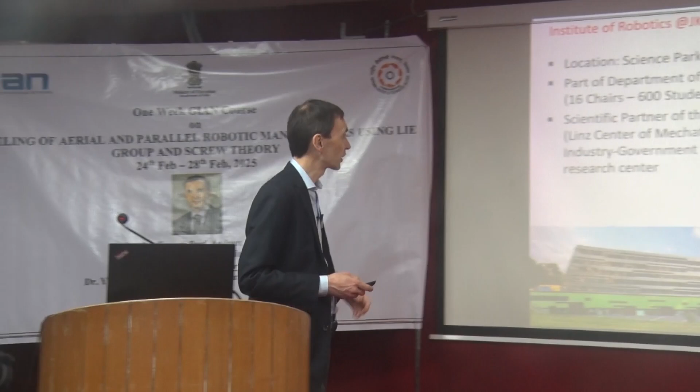You don't like them. Yeah. No, because they are quite complicated, right? And this kind of theory is supposedly much easier to do, and I believe it is. You just have to know it. So before actually going to see what that is all about, a bit of introduction about where I come from and what we are doing, at least roughly.

So where we are, maybe here. Okay, so zoom out. That's Europe apparently. This is Russia. You are somewhere here, just not visible. And we are here. This is Germany. This is Austria. This is Spain, and so on. So which part are we in? We are actually in this part, just between Germany and the Czech Republic.

And the university is called the Johannes Kepler University Linz. It doesn't say here. So JKU stands for Johannes Kepler University. You know Kepler? Yes, it's the guy with the stars and the planets and so on. Okay. So anyway, the structure maybe is interesting for you.

It's a bit different than you're used to, maybe. Every country has different structures. So we have the university as such, right? Then we have faculties. There's the faculty for medicine. Then we have social sciences and law. And then we have the natural sciences. And within the faculty, we have different departments, okay? And we are part of the department of mechatronics.

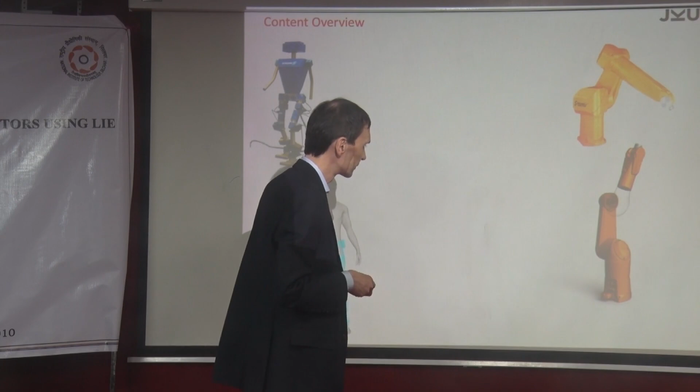Okay. No, this is one way. This way. Yeah. So systems. I guess you know many of these systems. Industrial robotic systems, I guess this is what you know, right? So this is a robotic arm. They call it a serial kinematic chain. In this case it's a 6 degrees of freedom system. Here we have also a 6 degrees of freedom system, but we also have a 7 degrees of freedom system.

And then we have, of course, humanoids. Right? This is our own humanoid. Of course, it doesn't look like the one from Boston Dynamics or any of these fancy systems. But anyway, it's our own and it's working. This is not really what we are aiming at. It's just for students, but a very interesting topic.

Then we work a bit on this. Yeah, what could it be? It's like an exoskeleton, like a lower limb support device, right? Because for many reasons, either you have a sickness or you get injured, you need assistance. And also our population is getting older, right? More people are needed to support elderly people, and of course we have a shortage of this. And this is why we are interested in low-cost support devices, assistive devices for humans.

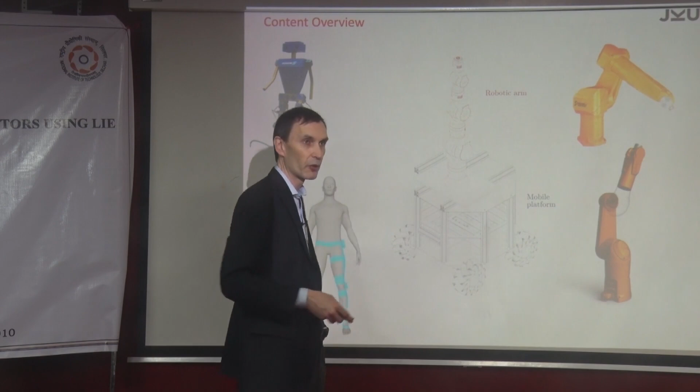Okay. And then, of course, there is this mobile manipulation topic, right? In the modern manufacturing industry or in other contexts, you have a robot, again a serial structure, like a robotic manipulator, and you mount this on a mobile platform. So what you have here is a mobile platform that can go all around, with omniwheels, for example. This is what's used in indoor logistics, right? These systems go through the factory autonomously. But now the idea is to have a robotic arm on top of it to do some manipulation tasks.

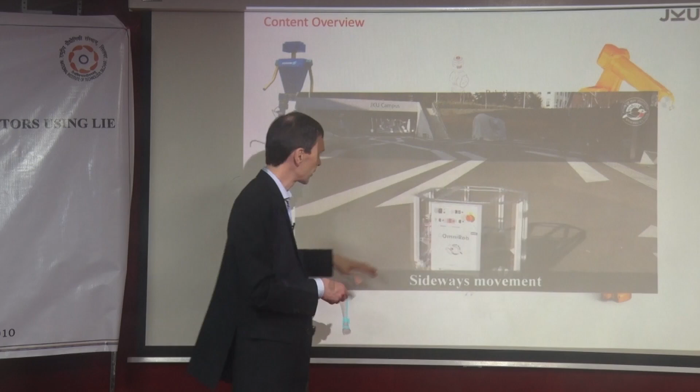And actually we have also this kind of thing. If you want to really optimize it and control it in a good way, then you have to understand the system first. And that's what we're doing here. This is our prototype from many years ago, an old video. This is how it works, and then you put this arm on top of it, and then you have a mobile robotic system. Of course, it's easy said, but not easy done, right? It was a bit of work to get the arm on top of it and so on. But anyway, it works.

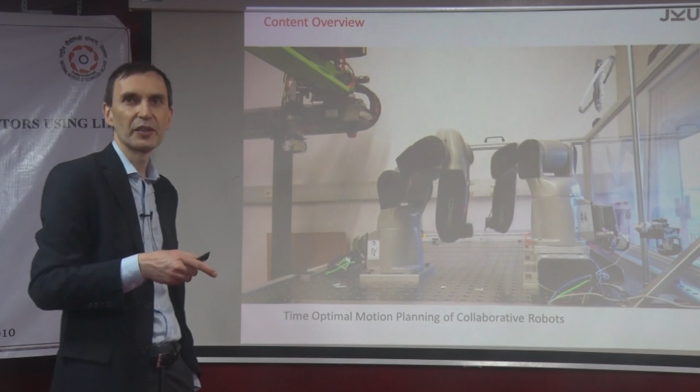Now, if you look at these robots, we have 2 robots here. Of course, they're industrial robots from Comau, an Italian company. And what you see here is what you cannot do with an industrial controller. They are operating with a speed that is not possible when you just use the standard controller. Yeah, I'm just looking here because I see the screen there. So what you see here is an operation that you cannot do with just the standard controller, right?

For many reasons, and one reason is that you wouldn't be able to move them as fast as possible without going into the system. This is why you need a model-based controller. So we have a model-based feed forward that is helping you. I'm not sure if you come to this point in the lecture. And the second important point is that they are actually avoiding collisions.

And that is something that is not easy. So we have 2 robots, they are semi-independently operating, and we are avoiding collisions in real time. So this is also something that is not easy.

Okay, another application where without models you wouldn't be able to do it is lifting of objects. This sounds pretty simple, right? So what happens here is that you have 2 robots, and they are lifting an object. Oops, this is so fast. Exactly, this is the object they are lifting. And by the way, that object would be too heavy for each of them, right? But together they can do this. And this is called collaborative robotic manipulation.

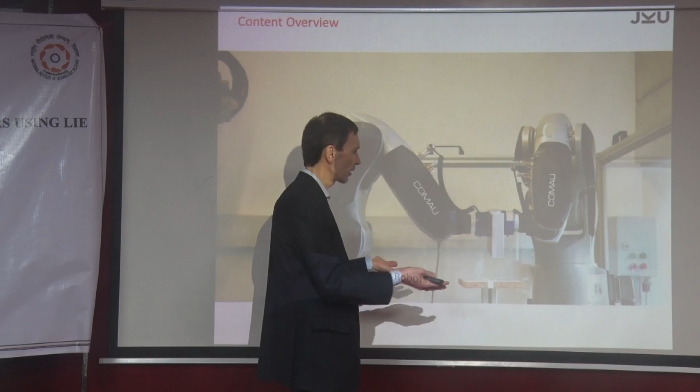And if you think a bit about what you have to do in order to get it up and running, that's not easy. Because first of all, again, this is with the maximum speed that you can do. But anyway, you cannot do this with standard industrial control. What you have to have is a model, and you have to have a good control scheme behind it. It doesn't repeat automatically, so I have to repeat it.

So what's the problem here? What are limitations of an industrial robot? What's, for example, the accuracy? So how precise can you position the end effector? So the end effector is this, the end, the flange here. If you control a robot, what is the precision with which you can reach a point? What do you think? Is it a millimeter? Is it a tenth of a millimeter? What is it?

Millimeter? Yeah, if you just buy it off the shelf, it could be in the millimeter range. And that of course is not healthy, because if it would be a millimeter, plus minus here and plus minus there, this would slip, right? So this is why you see these blue elements here. These are force torque measurement devices.

Okay. So what you do here is a kind of real-time, they call it admittance control. Essentially, you control a force, but essentially you control a kind of elastic behavior. And that's what you have to do. And that is possible. This is not new per se, but what is new is to do it with this speed, because this is real time. So this is also something just to motivate you, because without the model this would not be possible.

Okay, so let's go to the boring part of the lecture. It's all about mechanics. It's all about mechanisms. And what we are interested in is analyzing systems, in particular systems possibly with closed kinematic loops. Okay, so just to get you all on track, we talk about these kinds of systems here, right? They are moving. So when we say closed loop, this is a 4-bar mechanism, this typical 4-bar crank mechanism.

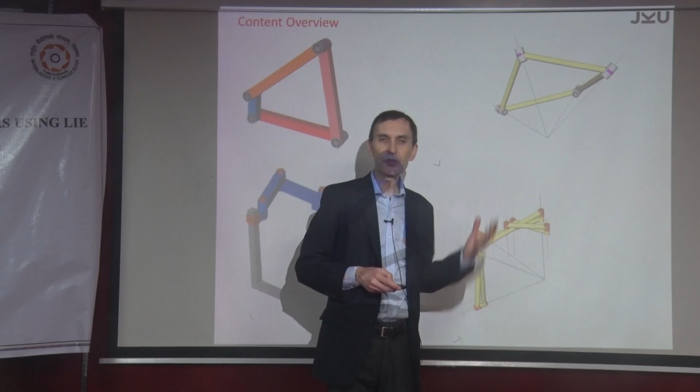This is a revolute joint, and here we have 4 revolute joints, and there is an intersection. For this special mechanism, the axes of the 4 revolute joints are intersecting permanently. This is why it's called a spherical mechanism. As a consequence, the 4 bars, the yellow thing, are moving on a sphere, and the center of the sphere is here.

Okay, but that is also a condition, because otherwise, if this would not be the case that they're intersecting, then it would not be mobile. It would be rigid. It would be a structure, right? If you are in civil engineering, this is good for you, because then this would be purely a static system. Pretty boring to us, because you want to have it moving.

Okay, so what's the connection between the two? Is there any? They have 4 joints, right? They have 4 revolute joints. Okay, is there any other similarity? Maybe? 4 linkages. Huh? Both have 4 linkages. Yep, right. What about the geometry?

One linkage fixed. Yeah, one link. No, it doesn't have to be. They can be free floating. This mechanism doesn't care if it's fixed or not. We'll come to this in a minute. Actually, what you're describing is what we call the topology. Because what you're saying is we have so many links, we have so many joints. That's fine, but I can close my eyes and just throw the links to the joints and I get something. But they are not just something, they are very special.

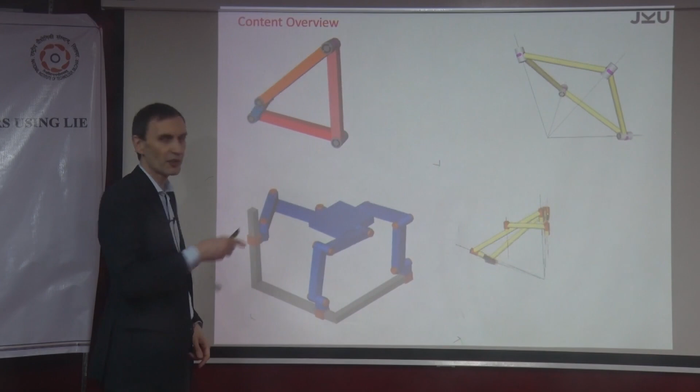So what's the particularity? Why is this moving here? Because the axes of the joints are all parallel, right? Otherwise it would not. And as a consequence, all the bodies, maybe this is fixed, maybe not, are moving in the plane, okay? And I was saying these four links are moving on a sphere. The similarity is that for both mechanisms, all joint axes are intersecting one point.

Here they intersect at this point, and just imagine you take this to infinity. So what happens if you go to infinity? Well, you are here, right? So this is just a projective equivalence. So they're essentially the same, just someone assembled them in a different way, but they're all satisfied by the same conditions.

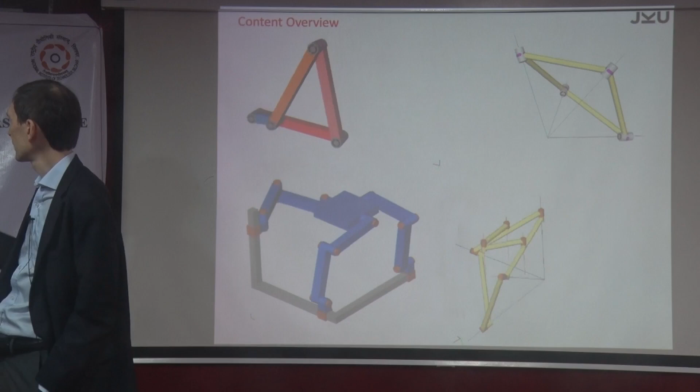Okay, then you can combine them to some funny mechanisms, and let's look at this one here. This is maybe an example of what we call a robot, and in particular one that is called a parallel kinematic robot, and we call this PKM. So PKM always stands for parallel kinematic machine or mechanism. So what's particular about this one? If you are in this area, this is the Singh mechanism that goes back to different authors at the same time, by the way.

And you can say this is the platform. So there is a platform that is to be positioned, right? And if you analyze it, you will see the platform can only translate in space. It cannot rotate. That's important. Number one. So let's say this is the output. You can put something on this. You can sit on it, or I don't know what you can do.

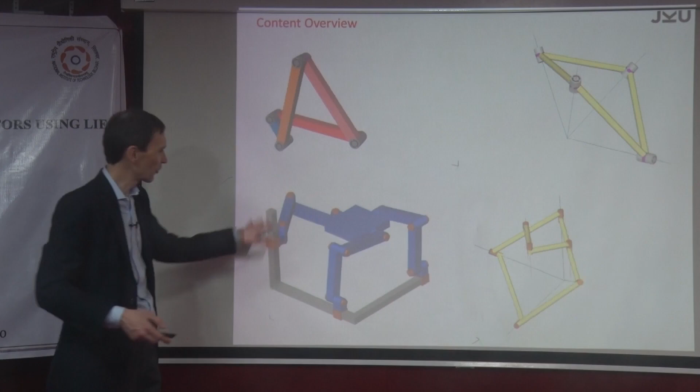And the inputs are the linear actuators, like the sliders here. So these are the inputs. If you have motors there, then you need 3 motors. And this is an interesting mechanism, because you have Cartesian inputs like linear or translational actuators, no revolute joints, right? It's all translations. And what comes out is again translations. You have 3 independent translations, and you have 3 independent input translations. And in between you have some mechanism that does whatever it does. Okay, good. Wonderful. More mechanisms.

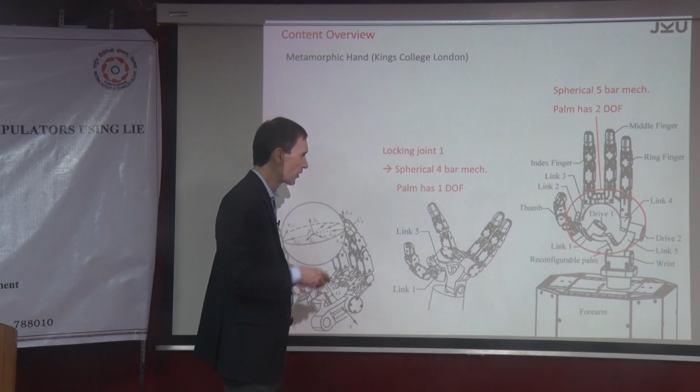This humanoid that I showed at the beginning: many times people want humanoids resembling humans in the sense that they also have hands, like robotic hands. Whether you need it is a different point. But if you go into the market and want to buy one, you normally get one with 3 or 4 fingers. And this was Professor Jian Dai from King's College London. He designed this hand. Does it say somewhere? Oh yeah, metamorphic hand. Metamorphic in the sense that it can change its mobility.

So what I'm talking about is, for example, do we have it here? We don't have it. If you look at this palm, it's not easy to see, I guess, but the palm actually is again a closed loop mechanism. It's a 5-bar mechanism. So you have 5 revolute joints.

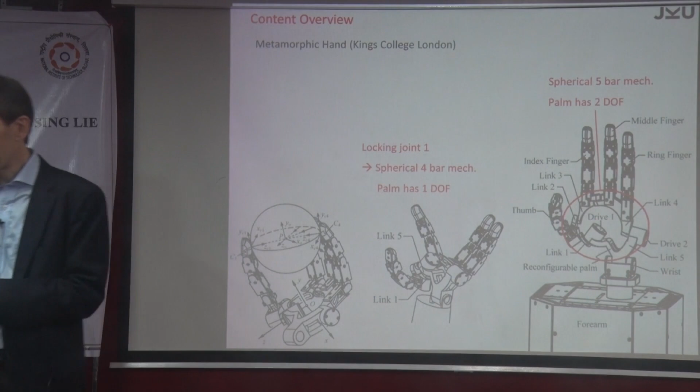Maybe it's not easy to see, but what the system can do is, so your palm, look at your palm, right? Imagine that you could not do like this. So it would always be like one rigid body, and try to do something sensible without actually deforming your palm. This is impossible, right?

But this is what you have when you buy these 3 or 4 finger robotic hands that are on the market. They always have 4 fingers fixed to something called the palm. And this is, of course, not really helping if you want to grab something, and that's why they had this invention. And it's metamorphic because you can somehow turn it and then it becomes again a rigid. Anyway, what I'm saying is that there's lots of different topology out there.

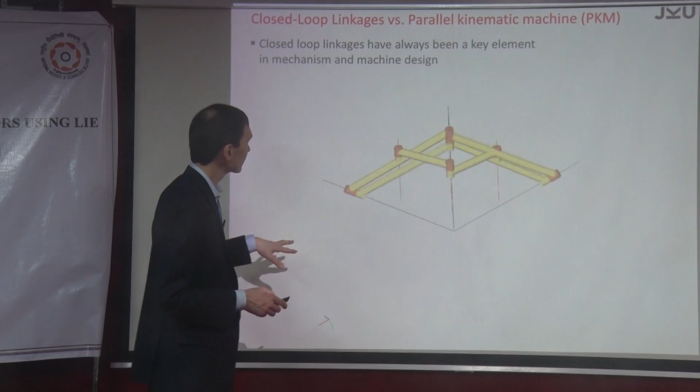Maybe I'll skip this one. Or maybe I'll just show it. But this is just an... I don't know why I put it in here.

There are other systems, free-floating systems. You mentioned that this is rigid, the 4-bar was fixed. Not necessarily. And there's one thing that, of course, happens in reality if you go to space, for example. There are many reasons, there's a big need actually for stabilizing satellites, or for stabilizing what we call space robots.

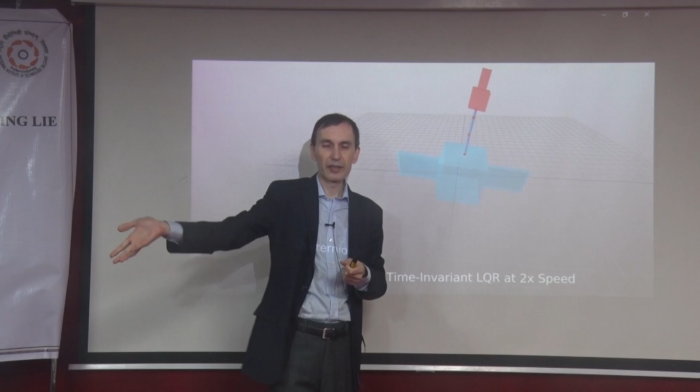What is a space robot? I know the picture is absolute nonsense, but anyway, this is a video. So let's say this is a satellite, and on the satellite is again a robotic arm, and this is in space. Okay, it's nice, but why do you need it? For many purposes, for example, for maintenance, because there's so many satellites.

If you go online and search, there's a nice chart. Well, not nice, it's a terrible chart actually. You see all these satellites and you see the debris. And that's a big danger, because this is going to be a very big problem for communications and for everything in the future. So what you have to do is somehow get all this debris out of space. And there's big and small debris.

And there are satellites. In the old days, if a satellite was not working, you'd just leave it there. That's not allowed anymore. You have to somehow get it. And that's the basic idea. So you have a servicer, like a satellite, with a robotic arm on top, and then you catch whatever you have to catch, like another satellite, you take it in, you do some repair, and then you get it out.

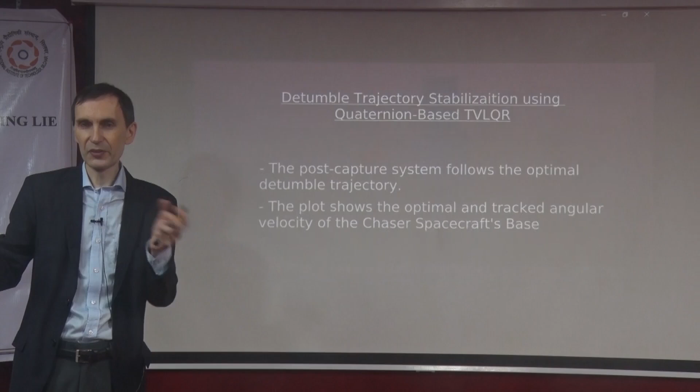What happens if you're in space and you're catching something? You start to tumble, right? Because you have momentum influx, and that's what you have to cope with. And this is what we did, and I'm not sure if this makes any sense to present, but anyway, it was in the slide.

What's this doing? Let's proceed here.

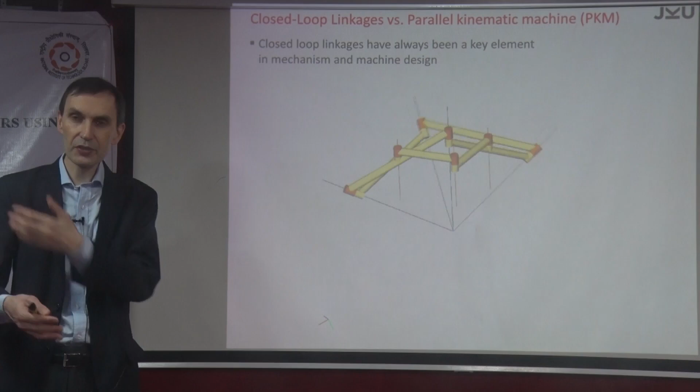I was actually alluding to PKM, as we call it, parallel kinematic machines or manipulators. Maybe a bit of history: when did robotics start? I don't know, but I guess the first robotic manipulator was in the early 1970s. They call it a robotic arm because it simply resembles your arm. You have 6 or 7 joints, or maybe 3 or 4, depending on what you do. And this is always an open kinematic chain.

Then in the late 90s, they started introducing robots with closed loops, like the one I've been showing here. This one, for example, is an outcome of the development that started in the late 1990s. And the difference to these robotic arms here is that they are just an open chain, one link after the other, and that's it.

There's the end effector. Here it's different, because there are multiple chains actually connecting the platform. This is a big difference from the modeling point and from the control point, and so on. And this is what we maybe have to look at first. So, in mechanisms in general, sorry, I'm not yet used to this one.

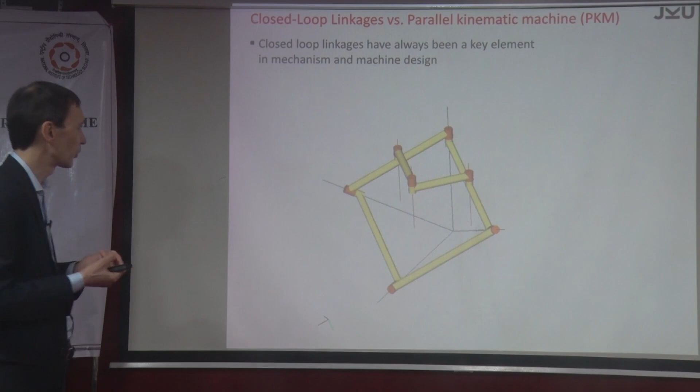In mechanisms in general, we are always using this kind of closed loop systems. So we always have mechanisms for one or the other reason. I mean, if you look in your car, if you look in your daily life, there are so many closed loop mechanisms. You may not even realize this, but there are so many closed loop mechanisms. So this is a kind of a standard practice since ever.

But in robotics, this is a bit of a new development. And we have to say what the difference is. A PKM, a parallel kinematic machine, is a special closed loop mechanism in a sense that we have a moving platform. And again, this is a different one. Maybe this is one of the oldest ones that was proposed. It's called the Gough-Stewart platform, or simply called hexapod sometimes.

So hexa means 6, right? Pod means, who can speak Greek? It means leg actually. And the hexapod is something with 6 legs. By the way, this is mostly a term from biology. Hexapods are insects, right? Okay.

Anyway, just go to the platform, because what you have here is a platform, and then you have 6: 1, 2, 3, 4, 5, 6. Well, they call it legs. They're not legs, that's not walking, but anyway, they call it legs or strut or limb or something. So this is the kind of ingredient for a PKM.

So you have a moving platform, and it's connected to what they call the fixed platform. Platform and ground, I would call it, because normally this is supposed to be somewhere stationary on the ground. So this is the fixed platform, this is the moving platform. Essentially, it's a moving platform that is connected to the ground. And here in this case, what you have is like a spindle, so you can actually change the length of these legs, these struts. Spindle drives or something, and that's it.

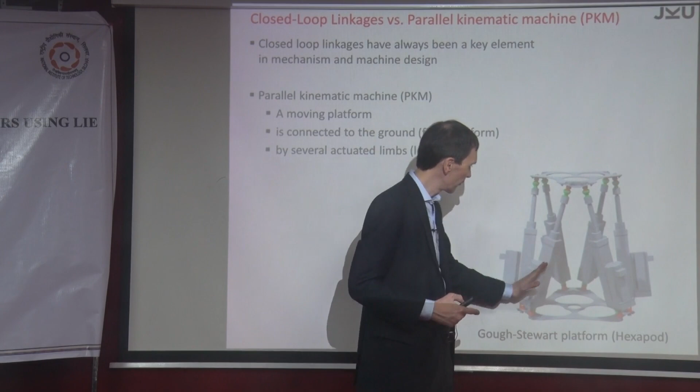So what is it then? We have here a universal joint. So what is a universal joint or Hooke joint? Yes, like a combination of two revolute joints. Okay, and then you have here the piston. So this is kind of a linear joint or prismatic joint, just pure translation. And then you have this spherical joint here, like a ball socket joint. Okay, wonderful. What else?

Good. And why did people actually look into this? Why did anyone invent this? Stiffness, for example. But essentially, what is it? If you again compare it to the standard robotic arm, where you have one link after the other, like the ones here, for example.

Imagine that you push at the end effector, right? Nothing is rigid in reality, that's for sure. So when you push at the end effector, you can measure some deflection. So what is the reason for the deflection, for this evasive motion? Well, simply some stiffness, right?

And what happens in this standard robotic arm is that you are kind of adding up the stiffnesses, right? You have the stiffness of this gear, then there's one here, and there's one here, and so on. And you add them all up in a long chain. And then this all together gives you the total stiffness.

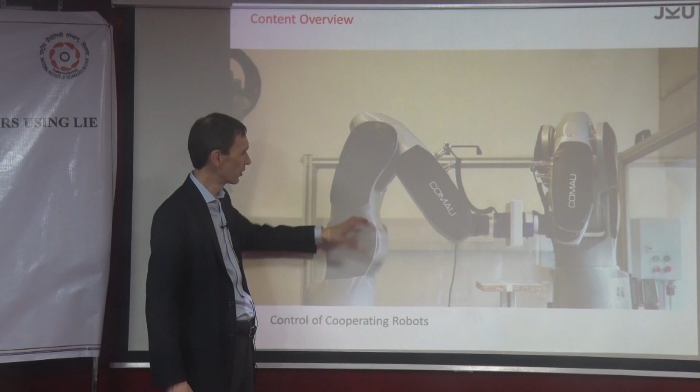And also, look at this motor here. There's one motor moving the system, and it's actually moving all the motors that come after it in the chain, right? And the same is here. So this motor is not directly influencing the end effector motion, but it has to move the whole system for no purpose actually, because initially I don't want to move the robot, I want to move the end effector, right?

So this was actually one of the arguments for having these PKMs, because the stiffness and the payload are increased. Because what you have essentially is one platform, and the aim is to move this platform and to generate, for example, a wrench, a torque and a force, at the end effector, at the platform. So you have one actuation system that is actually acting on the platform.

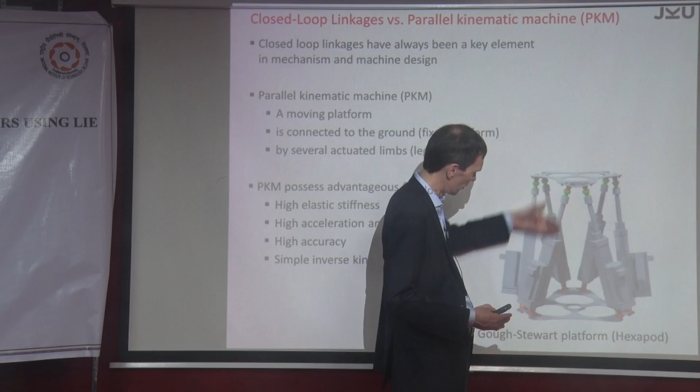And then in parallel you have another one. So actually what happens, you add up all these forces. And on the other hand, you have one of these struts with a certain stiffness, right? I mean, there's a gear here, some joints, and there's some stiffness. Of course, the stiffness is much lower than in the robotic arm. But what you do here, you kind of combine them in parallel, right?

And whenever you have springs in parallel, what happens is it becomes stiffer. It's very simple, right? So in the end, what you have here is a much stiffer system with much higher payload, and of course, because you have the motors all acting together in parallel, it's not like this motor has to move this motor and so on, and then eventually it moves the platform. No, here they're all acting at the same time in parallel at the platform. So you're actually adding forces, you're adding stiffness, and you're adding payload.

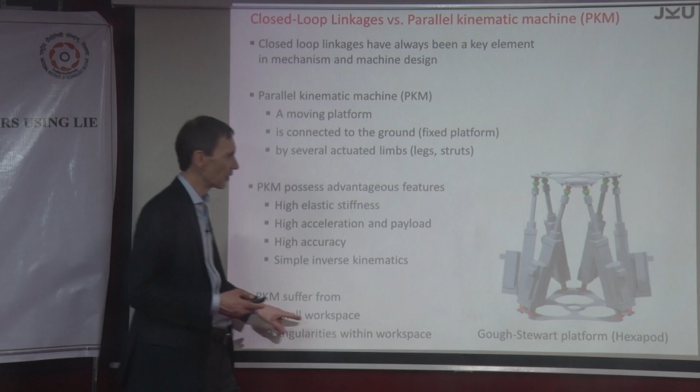So there's no free lunch apparently, right? I mean, this is what you learn in life. So there must be something. And what's the problem here? The problem is, if you look at the workspace, for example, the workspace of this PKM, this Gough-Stewart platform, looks like this. The shape is one thing, and the other thing is it's much smaller than what you have for these standard robots, right? Simply because if you move here, then you are colliding here, then you are in the limit of this joint and so on. So in the end, the workspace is limited.

So this is a design optimization problem. Because you want to design them such that you have all these nice features, but at the same time you want to maximize the workspace. But anyway, the workspace is smaller. And then we have singularities in the workspace. Not sure if you are familiar with this, but usually in the middle of the workspace you have some critical configurations, which are called singularities, and that happens only for PKM.

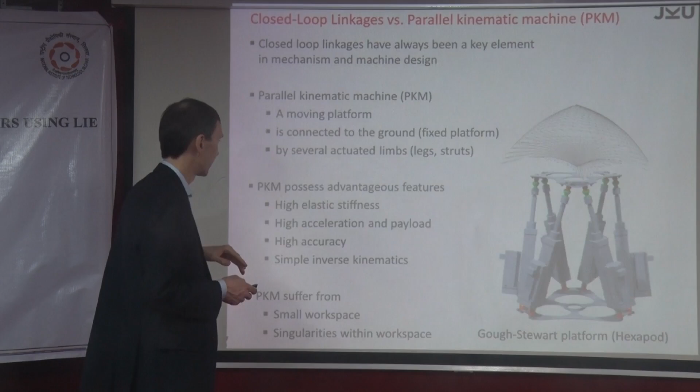And there are good examples for this. The oldest one, as I was mentioning, is the one from Gough. Stewart and Gough have been developing it at the same time, and that goes back to '47. And essentially, that's the PKM I was showing here. This is a very old photograph; this was a tire manufacturer, and this was a tire tester, right? They wanted a system that can push, generate high force, but at the same time is flexible. That's why they came up with this idea; the tires go in here. And then they push from here with the hydraulic cylinder, and that's originally where this came from.

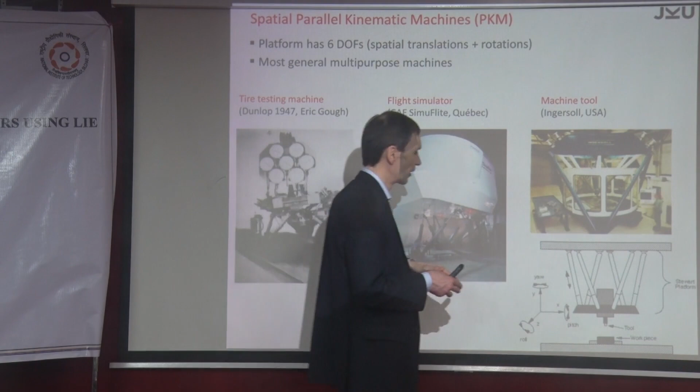And the same idea is used these days. There are big machines, even with a tank on top, where you have a flight simulator. You can really do flight simulation. If you go in there, you get sick, and of course you have hydraulic actuators, and it's a big machine. But at the same time, because of the high stiffness, it's also good to resist forces that are introduced by some process like milling, and that's why they are used.

That's a machine from maybe Ingersoll. I don't know. Many companies are doing this. So essentially, this is the PKM. You see again the hexapod here, and here's the tool, and you do freeform 5-axis milling or so. Right? And the good thing is that you can have high forces, but still achieve a good accuracy because of the high stiffness. Okay, perfect.

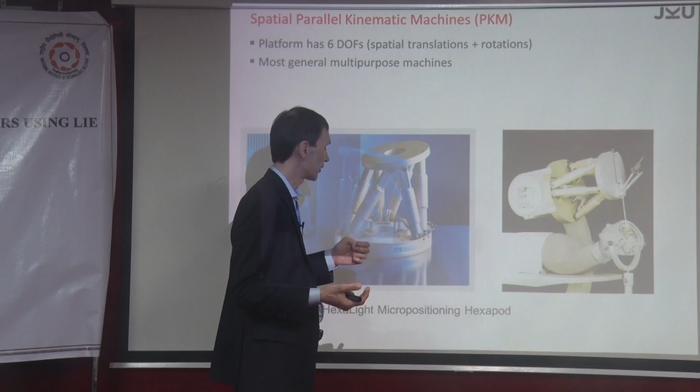It goes the other way also, like small forces, small workspace, and high precision again. This, for example, is a hexapod system, the same idea. But what you have here is piezoelectric actuators. So the change of distance is pretty small. I mean, it is some centimeters only, not that small. And because of the piezoelectric actuators, it's super high accuracy, so it's highly precise. And they are supposed to be used wherever you need high precision, for example, brain surgery. Never happened, by the way, in brain surgery. Okay, good.

To maybe just sum up this kind of overview, of course, this was a system that, by definition, had 6 degrees of freedom, right? Which is kind of obvious, hopefully, because what you need here is full motion capability. You want to have a free translation in space plus spatial orientation, and that's why you have 6 inputs. So you have 6 degrees of freedom, 3 translations and 3 rotations in space, right? But many times you don't need this, in particular in manufacturing.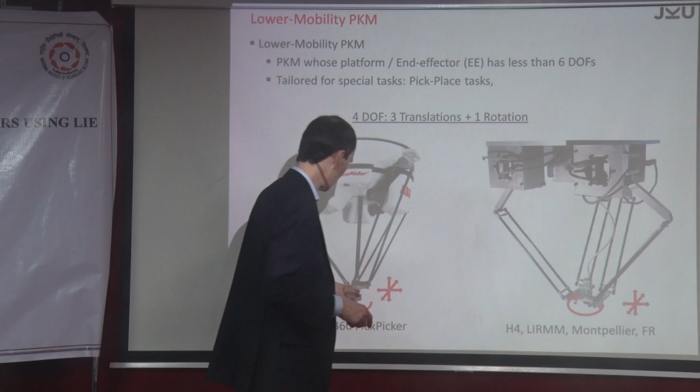Maybe not easy to see here, but this is carbon fiber. So very light, slender beams, and they are just actuated by 3 motors. It's not a good picture actually. So there's a motor here, essentially an arm that goes up and down. You see the same here. This is always ground fixed. So if this moves, then this point moves, and this point and this point, and you're moving the end effector up and down and so on.

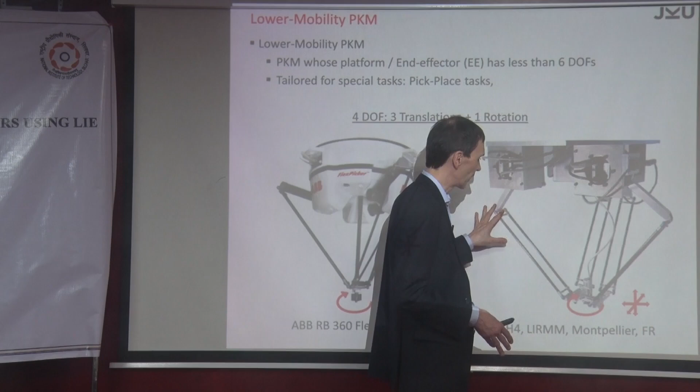It's again 3 degrees of freedom translations, but the moving mass is very low, because you only have to move these slender beams, and if you make them of carbon fiber or whatever, the weight is very low, so you can have a high speed, and that's what they do.

Okay, good. And there was a development here that comes from the... somehow it's... I don't know, the video is apparently not good. For some reason the video is moved up. I don't know. What you see is here.

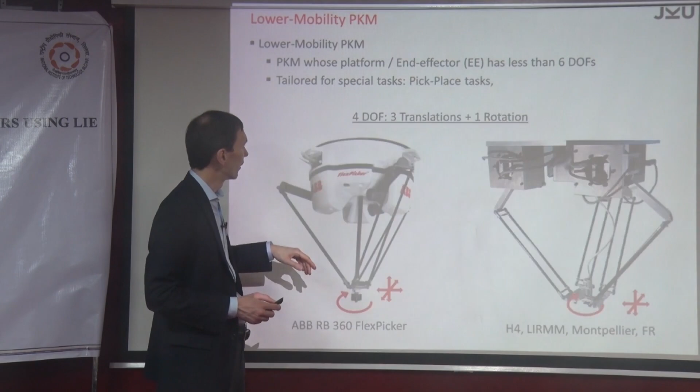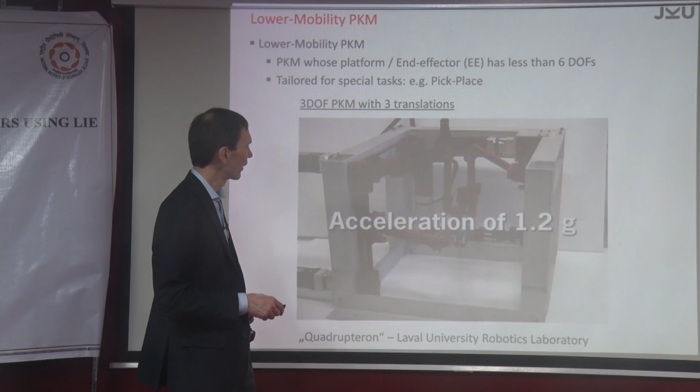And then the same group at Laval University, Quebec, came up with a different thing. They included one more leg: you have 1, 2, 3, and then a fourth one. The basic idea is to even more increase the payload and the stiffness. Because the system itself is very light, you have this direct translation from input to output, and with one more leg you can have a very high acceleration. What you see here is like 1.2G, 1.2 times the gravity acceleration, but they already went to 100G. Anyway, you can imagine how this works.

The problem with the limited workspace remains, right? And some years ago we came up with this idea. Essentially what you have here is again like a PKM, with 6 degrees of freedom actually. The end effector can have free orientation and translation in space. And you have 6 inputs, meaning each of these sliders can move in a plane, so X, Y of each slider, 2 translations per slider. So we have 6 inputs again.

So about the workspace: the workspace is enlarged, quote unquote, to infinity by having this freedom of moving in the plane, right? As long as you invest in this planar foundation, you can go as far as you want. Of course, this is usually with magnetic or air bearings and so on.

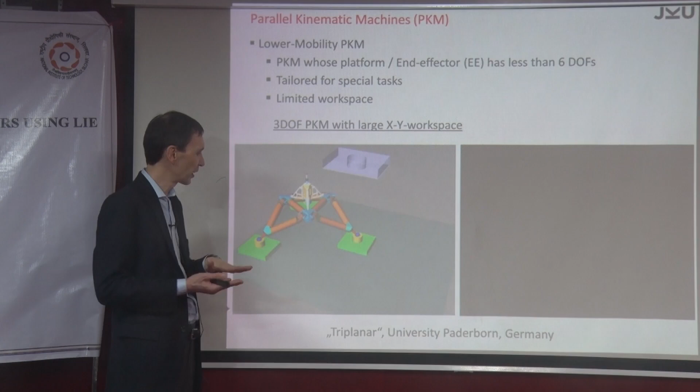This is not cheap, but if you need it, you can do this. Okay, and then finally there's an example, because the question here is, what's the degree of freedom of the system? And that's not easy to say, because that is an example where the degree of freedom is changing. Now what you see here, for example, is what you call a lockup mode, because if you look at the platform, it cannot move.

But then once it switches, it goes actually through what we call a singularity. The platform can move in the plane. Okay, and that's a planar mode. And you can imagine, maybe stop it, what could be the input for the planar motion? Because always the question is, what are the inputs? So is the motor here, or where are the motors?

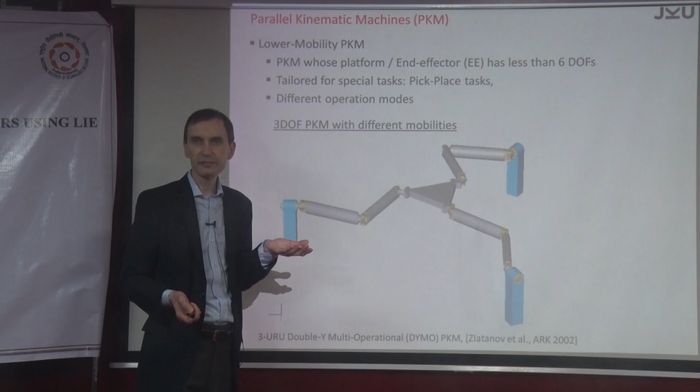So for the planar motion, and also at the beginning, like this one, what's the degree of freedom? Well, 3, because you can only turn each of the links. So 3 degrees of freedom. Okay? And what's for the planar mode? It's also 3 degrees of freedom. The only thing is that the motion mode is different, because the way it can move is different. Here it can move on a plane.

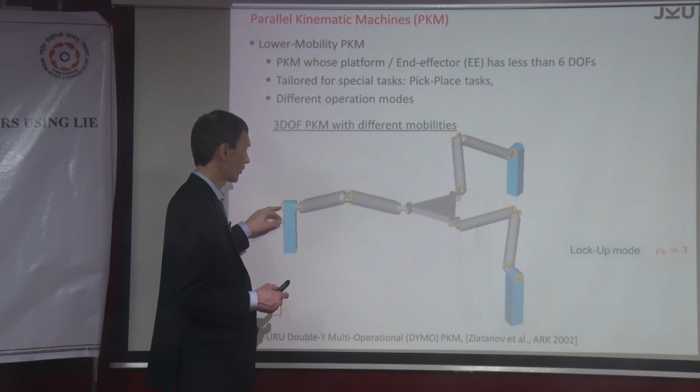So possibly you want this revolute joint to be actuated, so we should have a motor maybe here. Whereas in the first situation, like here, you might have to turn here, because otherwise you're not moving the system. Okay. Anyway, so this is an interesting thing. I don't think it has a practical application, but anyway, it's there.

So finally, there are other mechanisms; all of them we call lower mobility mechanisms because they all have degree of freedom less than 6. And there's one that is coming from Laval University. They call it an agile eye. So like an eye, but an agile eye. And essentially it's a pointing device, because what you see here is we have 1, 2, and here's the other one. So we have 3 motors, right?

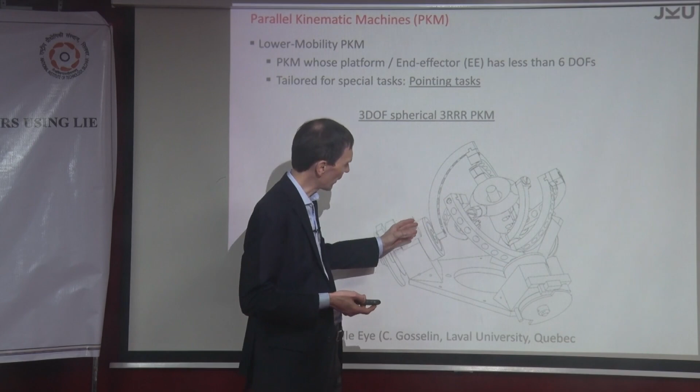And they are turning. Again, this is a spherical mechanism, because if you look what happens here, we have 1 revolute joint, 1 revolute joint, and the other one comes here. So they all intersect again at 1 point. So whatever they do, they can only turn this, let's call it, platform. And if you have a pointing device, then this is easily positioned, and also it's very agile because the moving mass is very low, and you can have very high and precise motions.

Okay, and eventually what people came up with is having more inputs than outputs. This sounds a bit redundant, and in particular this is actually redundant. It's called redundant actuation, right? So look at this one for example here. This is from a Chinese university, from Tsinghua. What you have here, this end effector is only moving in a plane again, okay? So this means 2 degrees of freedom. This means you need 2 inputs.

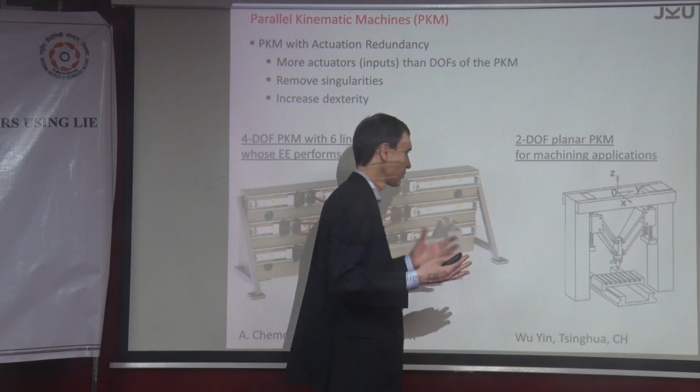But they have 4. Essentially they have 2 spindles here, 2 spindles here. So one is moving this end, and that end. So you have 4 inputs. Why? It's just because you have more power, right? And also because you can homogenize the transmission properties. But at the same time, you have to be very careful, because if you have more actuators than degrees of freedom, you have to really synchronize them, because otherwise they are fighting, interfering with each other.

And this is a machine that comes from Montpellier in France. The same. So it has 4 degrees of freedom, but it has 1, 2, 3, 4, 5, 6 inputs. This is actually a big behemoth, a big monster, so to say. But they are very strong. It can be very fast. The height is like this, and this is actually a big, I think it was marble or concrete or something. It was a big stone, because it's so fast that you have to have a foundation that withstands this.

Anyway, good. There we go. I think we should maybe get slowly into the mathematical topic. What about this redundancy? What about singularities?

Look at the left-hand side. So this would be, again, a mechanism. I mean, it's called a mechanism. There's 2 motors, 1, 2, as input, and what you do, you turn them, and then you're essentially positioning this point in the plane, right? So if you look from top, it's more like a 5-bar mechanism, 2 inputs, and then you position that one. What happens at that particular configuration?

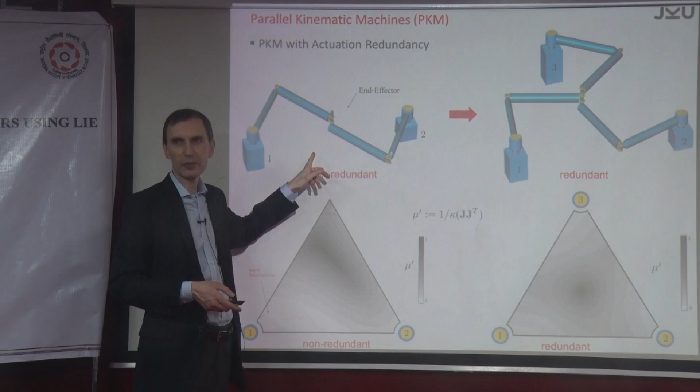What is possible here? What is not possible? Okay, what I'm asking is, the motors, the inputs are here, this one and that one. Okay. So question is, can you generate a motion in this direction? No, you can't. Because if you move this one and this one, whatever happens, you only go this way, right? Because they are just aligned.

I know it's very simple, but that's a very special case of so-called singularity. So this is what you cannot do. You cannot generate motions in this direction. If this is not aligned, then you can, right? Then you can always. So this is what you cannot do. What else can you not do?

You cannot withstand the force in this direction. I mean, you can even lock these actuators. I can push here and this flips in this direction, right? What can you do? That's a good question in this case. Okay, anyway, so this is it. To get rid of this, because this is in the middle of the workspace, right? If you look at the workspace, this is more or less in the middle, and if you look on top, this is where you have this kind of situation.

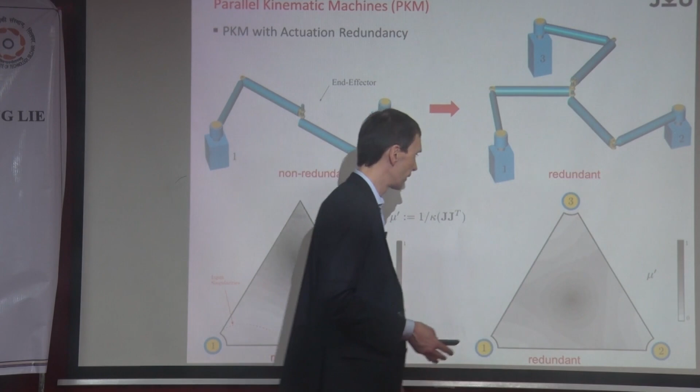But if you add one more of these legs, then you get rid of the singularity, and also you homogenize the transmission property. There's a measure for measuring it. Anyway, I'm not going into detail. You see that this is, of course, somehow not homogeneous. Here it is much more equally distributed, and that's one other reason for actually introducing redundancy. The last and final version of redundancy is... No, this is not redundancy.

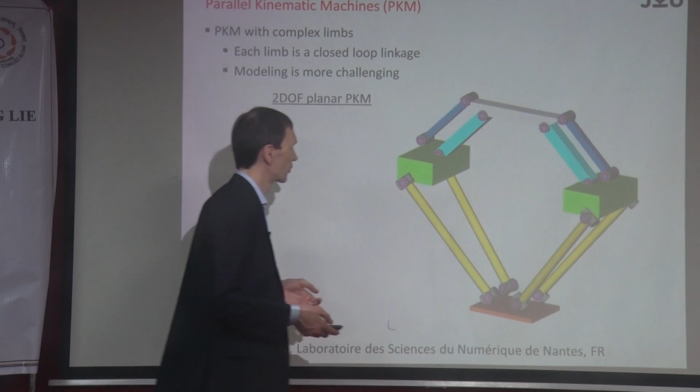What was the common denominator for all these systems? The common denominator is that we have exactly one single, simple chain here. All these legs are just kinematic chains, right? There's one joint, next joint, third joint. There are no closed loops in it. This is normally the case. And what some people did is actually to introduce this kind of systems.

And it looks like this, right? So it's moving. So essentially you have 2 degrees of freedom, in the sense that the platform can only move in the plane. It cannot rotate. So you have just the X, Y, or whatever the coordinates are, okay? So 2 inputs. But the difference is, there's a loop here, right? There's a closed loop here, there's a closed loop here, and again, this is the same here.

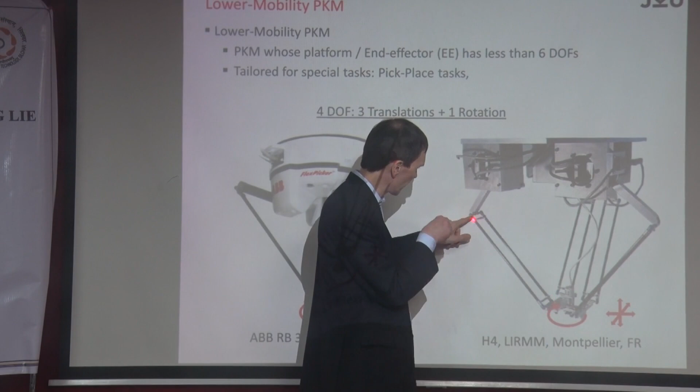And by the way, this was already the case for the delta mechanism, because the delta mechanism is one of the first that was introduced with closed loops. Because what you have here is these struts, connected by 4 socket joints, right? So essentially you have, again, the closed loop here, but this is a very special kind of closed loop. Okay, and I think now we should get to some more details.

So we talked about loops and not loops and joints and where the joints are. And at the beginning you mentioned so many joints, so many links, but what about the geometry? We really have to separate: first of all, look at the topology, and then see what particular geometry we are going to give the mechanism. If you look at all these mechanisms, there are different topologies. We need, just for completeness, a bit of terminology.

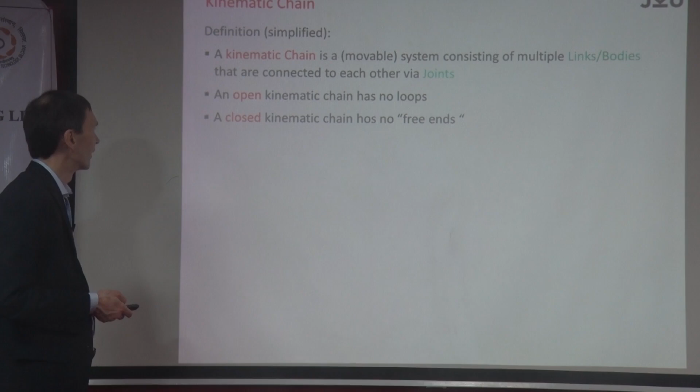And that's when we have an open kinematic chain. Open means that there's no loop, okay? And closed is, of course, the opposite. A closed kinematic chain has no ends, has no free ends, okay?

A good old example is maybe the human body, right? If you're in biomechanics, or if you are working on, for example, exoskeletons, as I was saying in the beginning, if you want to develop a system that supports a human, then you have to first understand the kinematics of the human body. Now, how do you model a human body? The interesting thing is the human body is modeled as a multi-body system.

So essentially multi-body means multi-link, right? So you can say, if this is a one-dimensional system, the hand is one link, or one body, then comes the lower arm, the upper arm, and in between are joints, right? But of course, technical joints, not biological joints, because a biological joint is completely different from a technical joint.

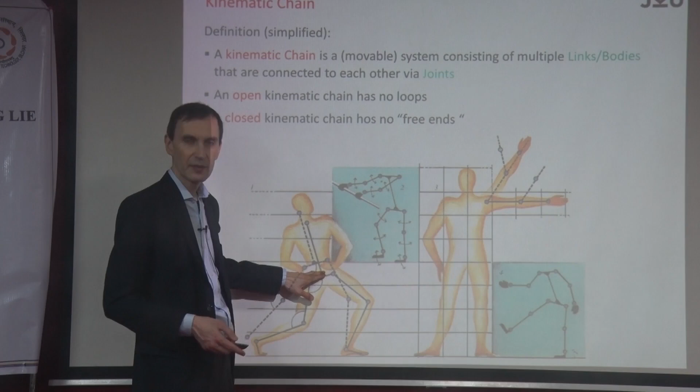And this is a nice example for topology, for example the free-floating human body. If you look at this mannequin here, this is a kinematic chain. It has no closed loops, because the human body does not have closed loops if you are not fixing it to the ground. But it has what we call a tree structure, in the sense that you can take the hip as the root of a tree, and out of this root emanate all the kinematic chains.

And this brings us to some further definitions, because what I'm after now is the topology. We talked about a kinematic chain and an open kinematic chain. An open kinematic chain has no closed loop. What about systems with closed loops? There are special systems with closed loops, and these are what we talked about, the PKM.

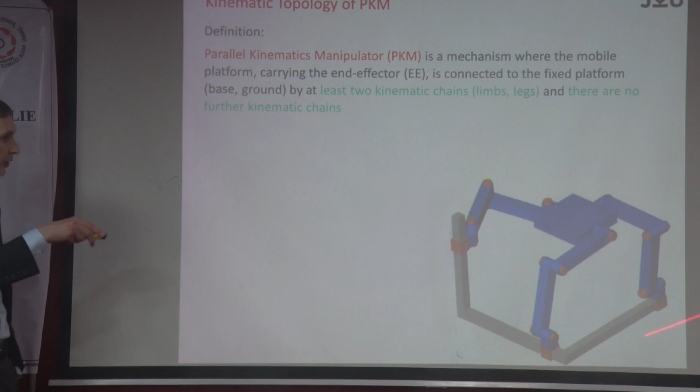So a parallel kinematic manipulator, sometimes called a machine, is a mechanism where the mobile platform, for example this one, is connected to the ground by at least 2 kinematic chains, and there are no further kinematic chains. So it's not like there's some chain sticking out here. Essentially the platform is connected to the ground by certain kinematic chains. This of course has kinematic closed loops, but it is a very special closed loop mechanism.

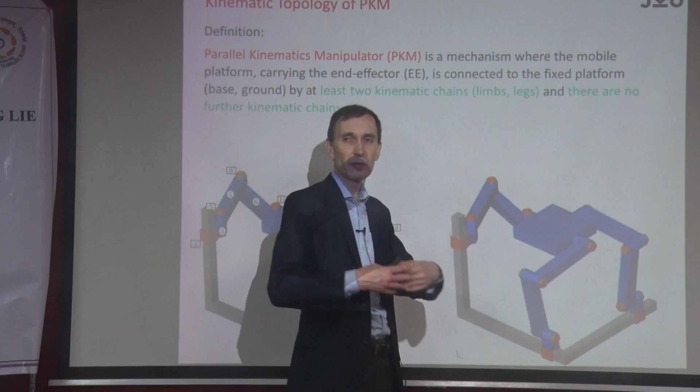Okay, how do we represent it now finally? First of all, why don't we number the bodies, or the links? Because we are talking about a stationary system, the ground always gets the number 0. There's one body I'm not interested in, but I have to somehow number it, which is the ground, because the ground's not moving, for the time being at least. And this gets number 0.

So ground is number 0, and the rounded numbers, these are the bodies. So number 1, 2, and you can count, I guess. Apparently we have 10 bodies here, and number 10 is the platform. What about joints? Then I number the joints, number 1, 2, 3, 4, and so on.

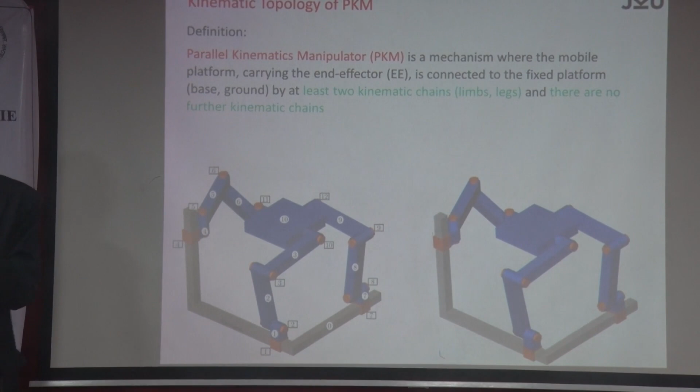Very nice. So now imagine you want to write a computer program for simulating multibody systems, or for simulating robots. What data structure would you actually use to represent the topology? Because somehow you have to store data of your system, okay? So what data would it be? Eventually it will be the geometry of each of the bodies, the mass, the inertia, whatever you need. But before you do this, you have to have a certain storage, right? A certain data structure where you put all this data in. So which one? Good question, right?

And essentially, I'm too fast, sorry. Forget about it. So there's a very good data structure, and a very good mathematical concept, which is just a linear graph. A graph is very simple. There's lots of theory of graphs, but it's not for us here. A graph to us is just a set of vertices and edges. And the vertices are our bodies. So we have number 0, of course, the ground, and then we have whatever.

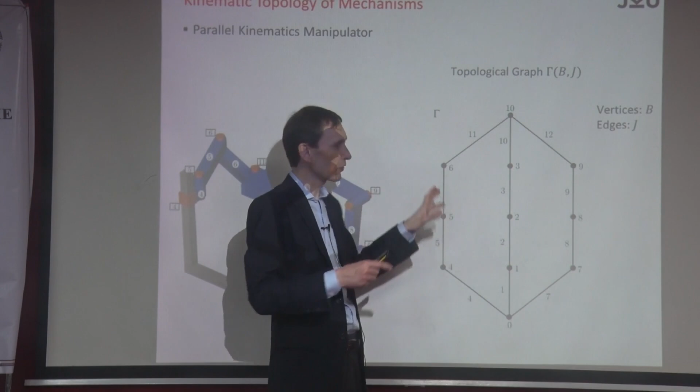So look here, we have the ground, number 0. Then we have 1, 2, 3, and then 10. So I placed the graph such that it makes a bit of sense. The bodies are connected by joints, and in between the vertices are the edges. So the edges are representing the joints. So I know exactly which body is connected to what other body by what joint.

So now in your data structure you will have a graph. Each of the vertices represents your body, and then you would say, this has 6 kilograms, and this has such an inertia and such geometry, and so on. And then you have the edges in between. What kind of properties do they get? Well, certainly the type of the joint. For example, one is a prismatic joint, a pure translational joint. Number 2, you would say, is a revolute joint, and so on.

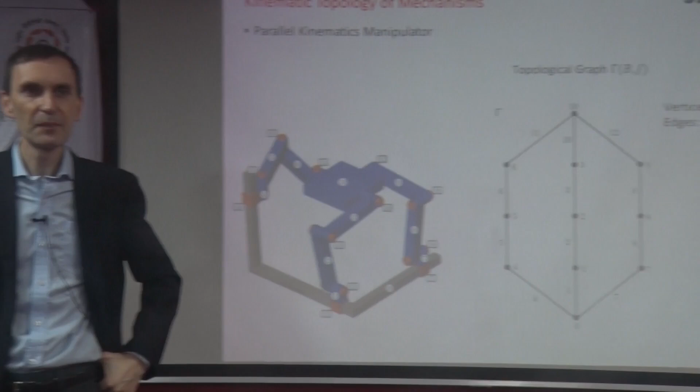By the way, do you use, like C++, object-oriented programming? Because then you would have a class, right? You would have a class joint, a class body, and so on. And each of these classes has members, which are all these properties. And you have methods, right? For example, one method for the joint is to say move or something like this. We will see this. Okay, that's it.

Then of course we have these systems. So then we have different numberings. I use Arabic numbers, but you can also use Roman numbers. You can also have pictures. It's up to you how you call the edges and vertices, right? You can call it Mickey Mouse or Hollywood or I don't know what. That's up to you.

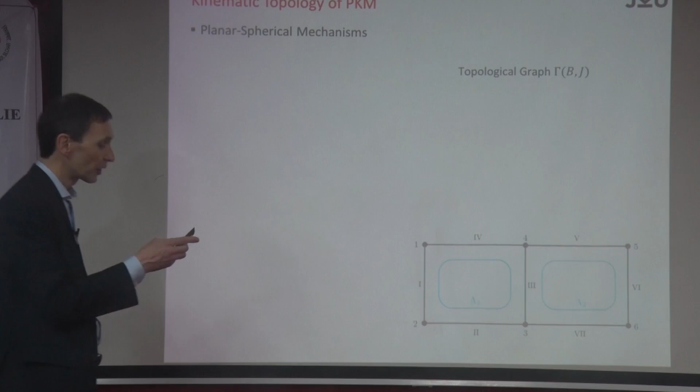Now the question is, given this system here, how does the graph look like? Well, I've shown it already, right? The graph is probably unique because once you have numbered the edges and vertices, this is the graph. What you see is that there are loops in the graph, which correspond to kinematic loops in our mechanism. Because now you're working on the graph, but don't forget, this is a topological graph. It has to do with kinematics.

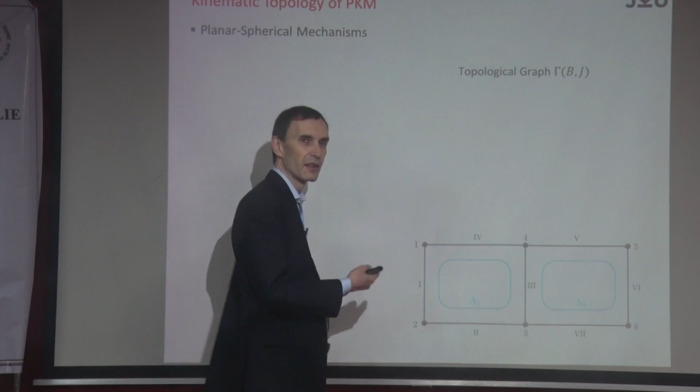So now we see that there are loops in the graph. The question is, how many loops do we have? Well, you see probably 2, right? I numbered them 1 and 2. Some people number them differently. It doesn't matter. Do we really know how many loops we have here? Can I have more loops? If you have your class graph, it will have a method like compute loops. How many loops do you have to compute? Well, I have 2 here.

Can we have 3? 3. Wonderful. Can we have 4? Okay, you can have it. Maybe. I'll repeat my question. Can we have more independent loops? The answer was correct when I asked, can we have more loops? Yes, you can. Now my question is, can we have more independent loops? But you should ask me, hey, what does independence mean?

I don't know. We don't have time for that.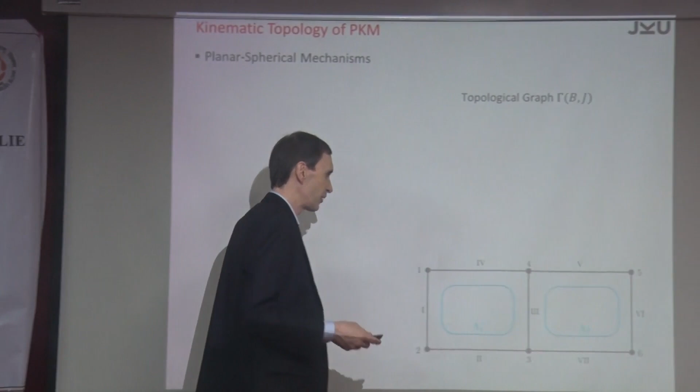Who's in electrical engineering? Okay, so you know about the circuits, right? This is like a network. And then you know, I guess, how to introduce fundamental, how do you call this, loop currents, right? I'm not sure how you call it. Yeah, I guess that's what you call it.

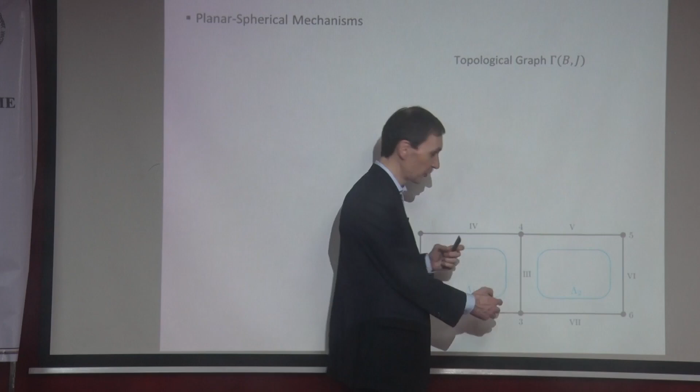So let's say this is an electrical network. So you have certain elements in here. What's the name in English of this? So let's say there's a current here, right? So this current can be represented as the sum of the current in this loop and this loop. And how is this procedure of finding the loop called?

At least you know hopefully what she's saying. No, I know what you mean, but I have no idea about this term. Yeah, so essentially it's the same. How do you find these loops? Because this is the same question. How many independent currents can you find? How many independent loops can you find? And that method is the same.

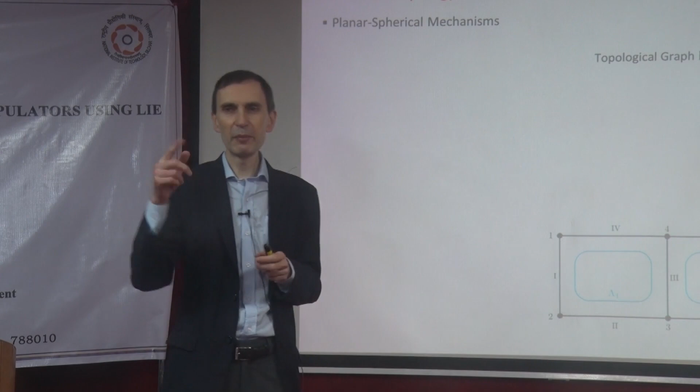It must identify nodes. Yeah. So you know how to do it, and it's the same procedure. So you find independent loops. But the good news is, if you implement this, your class will have already this function, right? Because in most of these languages, you have a data structure that's called graph, and it has the method find loops.

Okay, good question. I would say you only have two independent loops here. Because you can have, for example, this one, but the current of that loop can already be represented by the two loops here. So this is not independent. Because we talk about electrical currents now, this is not an electrical network. What would be the equivalent for the current here?

So what was the edge? That was a joint, right, in our case. What is normally in electrical engineering the edge? There are elements like resistors and stuff. There's the electric current. And the electric current has to do with speed, right? With the change of charge. Yes, the time change of the charge.

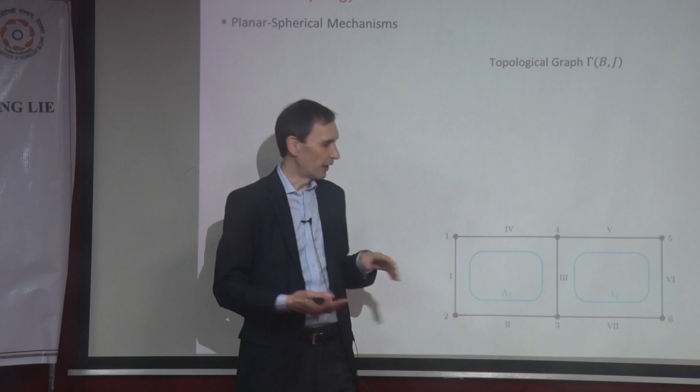And the same is here. The edge is our joint variable. For example, a revolute joint is an angle, a translational joint is a displacement. So our current would be the velocity, right? And in the end, of course, when you have a closed loop, the velocities of all the joints there should sum to zero, because otherwise it wouldn't be closed.

Long story short, we can actually have different loops. So we can have this one, for example. They're independent. You can also move this one here. So the thing is, the number of independent fundamental cycles, as they call it, is unique. The fundamental cycles themselves are not. You might change them.

Then we have different topologies, like tree topologies. So this was a closed loop mechanism, and the topology graph had a closed loop. Now go back to the humanoid model. Normally the hip is the starting point, though you can also have the feet.

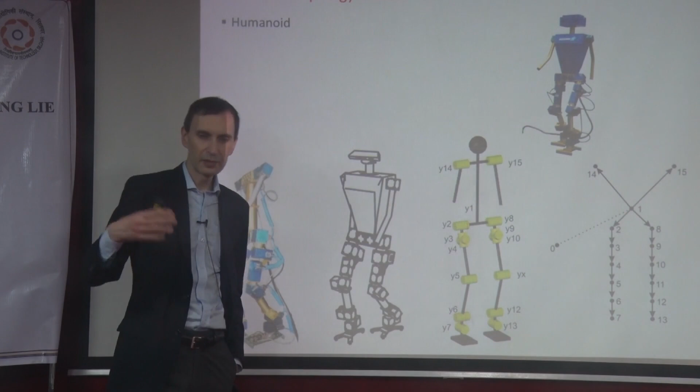Maybe you swap it upside down. This is called the tree structure, because it looks like a tree. There's one root, and then everything emanates from there. And it's the same here. There are different models, even high fidelity models for human bodies.

But the simple model is that the hip joint is just a revolute joint plus a universal joint, and the knee joint is a revolute joint again, which is not true, of course, because you can also do a bit of this, and so on. Anyway, you can have as many as you want, and then you number them like this. So the hip is number one, and then you number them as you like.

And in this case, it's not fixed to the ground, hopefully, right? Because you're not fixed to the ground. In particular, the hip is not fixed to the ground. That means that in your graph this line doesn't exist. So essentially, you have the humanoid graph, and then there's this kind of isolated node, which is just the ground, because the universe is floating around.

Right? Okay, good. What do I have to say? I don't know. What do I have to say?

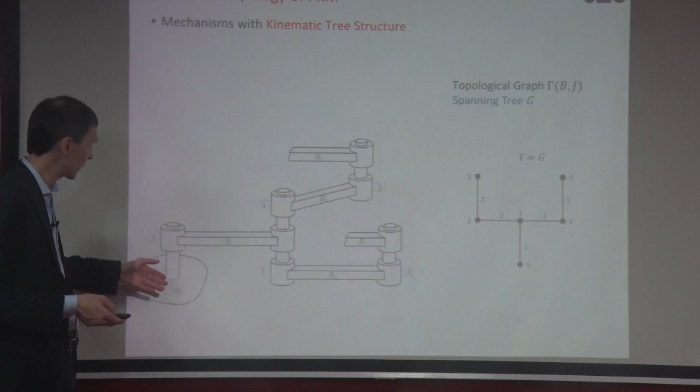Yeah, so anyway, the graph looks of course different, and the same is for a grounded one, for example. I mean, this is just an example. It's just joint, joint, joint, joint, and then it looks like this. But the important point here is that we have a kinematic topological tree structure.

What's the time? Till 1:37. Wonderful.

So it looks like a tree, and it's a tree structure. When you do your programming, at one point when we look into the kinematics, you will have to say which body comes after what body. For example, I would like to compute the motion of body 1 as a consequence of joint 1 rotation. This joint influences that body motion. Body 2 motion is influenced by this joint, and that's it.

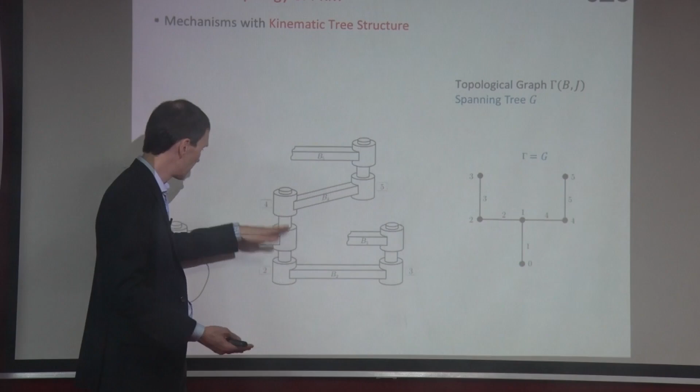So at some point you will have to say which link, which body and which joint comes before another joint in order to actually compute the kinematics. Now, if you have a closed loop system, like this one, that's not easy. It's not even not easy, it's not possible, right? Because what's the predecessor? What's the successor here? But what you have to do is to introduce this kind of tree structure, even for the closed loop system. And that goes like this.

So let's again use this example of our PKM, the moving platform connected to the ground by 3 links. That was the topological graph, and I would like to introduce a tree structure in this. That's again from graph theory. For any graph, there is a spanning tree. So what's a spanning tree? Let's say we have a graph. You get the spanning tree by cutting off edges, and you remove them as long as you have a graph that has no loops, but comprises all the vertices.

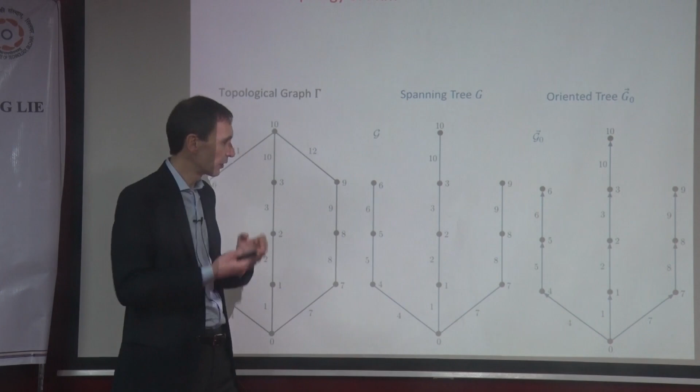So I cut this one. The vertices of course are all in there, but I still have a loop, which would be this one. Then I cut this one. So then I have all vertices and no loops. If I would cut further, like this one, then I would lose some of the vertices. And so there is a unique spanning tree for any graph, because now you can actually talk about the unique predecessor. You know exactly which link or joint comes before another joint.

So let's say number 3, for example, it's absolutely clear which joints and bodies are coming before as predecessor of body 3. Because a body or a joint is a predecessor if it is in the path to the ground, since there's a unique path to the root of the tree. Any vertex or edge that is in this path is a predecessor. And the direct predecessor is just the one that comes directly before. And if you really want to go into programming, then you need to introduce a directed tree, but that's not so much interesting for us.

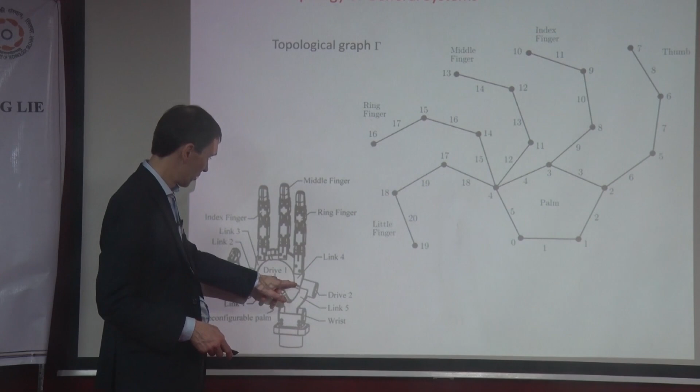Yeah, and then of course it looks differently for different systems. That was actually the topological graph for this metamorphic hand. Again, maybe here you see it better. You have the 5-bar system. So you have the 1, 2, 3, 4, 5, sorry, 1, 2, 3, 4, 5 revolutes, because the edges are the joints, connecting the links that make the 5-bar system. So, I don't know, link number 1 is this one probably, then this one. That's not a nice picture. Anyway, and then come the fingers, and then that's it.

So this is a kind of a mixed system, right? Because you have, of course, open kinematic chain here, and then you have the closed loop system here, and there's one single loop, and of course you can open this. And the same goes with this mechanism. And you see, for the PKM, there's always a nice structure, and this structure is what we're going to employ for the modeling of the PKM, because there's a whole theory for modeling general closed loop systems, and that's a bit mind-boggling. It's just not that easy.

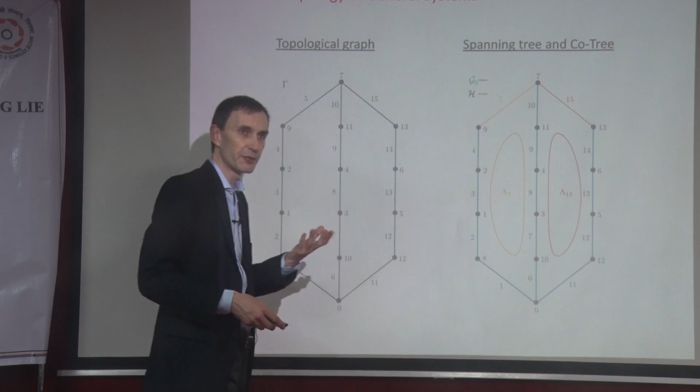But for the PKM, we will have, let's say, an easier approach. And this approach exploits this very special topology, because it's always like that you have the platform connected by the kinematic chains to the ground. And maybe intuitively it's already clear that you can somehow treat all these chains independently, separately, and then somehow combine them. So this is going to be the main idea.

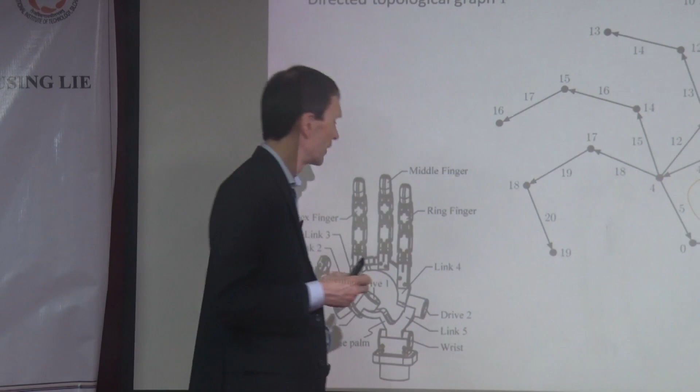The one with the hand. This one. At the fourth joint, why are all the fingers connected? Is it because these 3 fingers are interdependent on each other? Like we could have had 5 integration points. Yeah. I really have to find a better picture. So essentially, look at this, that's the palm actually, right? And the palm is split into a 5-bar mechanism. And you see there are 2 fingers on this part of the palm. So we have 5 links. 1, 2, 3, 4. I see 4, right? Not 5.

Maybe this is the parked position, because there is one position where it's parked with only 4 fingers. Good point, yeah. As far as I see, link number 4 has 2 fingers, ring finger and little finger. But in this picture, only till the ring finger, there is no little finger. In this image, the little finger is also included. I guess this is why it's called a metamorphic hand, because you can move the 5-bar so that you lock one of the joints and it becomes a 4-bar again. And then you only have 4 fingers, but I don't see where they get rid of the finger. Here you see the little finger is there, but in this picture it's not. Yeah, that's the point. I don't know.

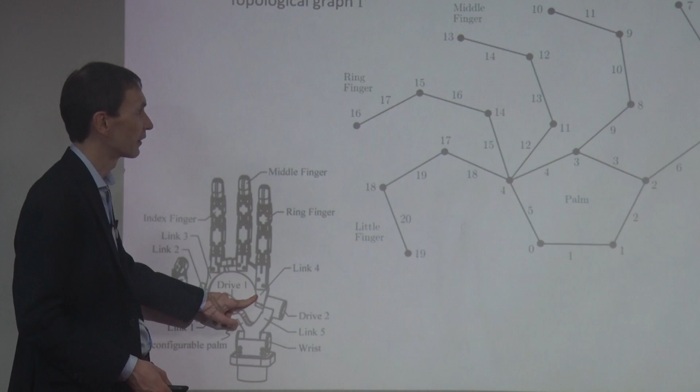So the question is, why do the ring finger and middle finger have the one joint? Maybe I copied the wrong picture. You have the middle finger, the ring finger on this link. See, this is one link here. In the 5-finger hand, you have also the little finger here. But the important thing is, because the palm is a 5-bar mechanism, it can move, right? That means the attachment points of the index finger and the thumb are moving, and these 3 are fixed to one part of the 5-bar. So maybe they are interconnected.

I can check it out. When we try to move this one, they usually move a little. Yeah, but that's the biology. Yeah, good question. Everybody's tired.